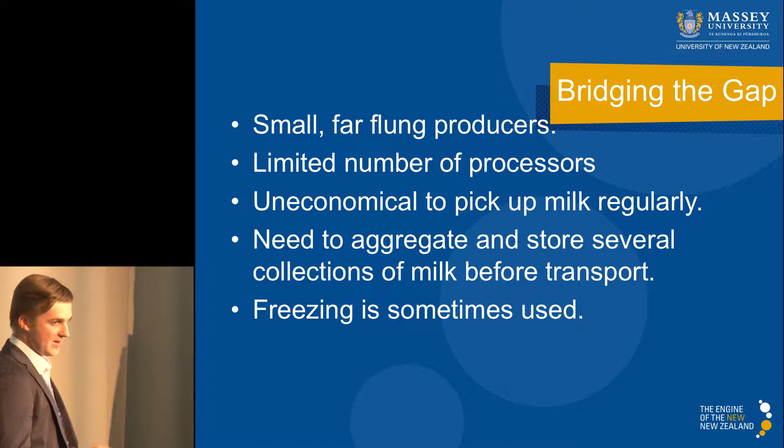So the aim of our project is effectively to bridge the gap between a small producer and a processor. So if you're a small producer, you might not produce the volumes where it's economical to have it regularly picked up to an outside processor, so you need to therefore make your own added value products. And on the other hand, if you're a processor, you might find it difficult to get a number of small producers. So what we need is some way of aggregating and storing several collections or milkings worth of milk before it can be sent off.

So what is sometimes used is freezing the milk. However, this freezing is generally done using a slow freezing method by putting bags like these of about 10 to 15 to 20 litres in blast chillers. And this can lead to some issues such as losses in cheese yield, changes in the total solids, components of milk, separation and oxidation of fats into some rancid flavours, reduced protein digestibility, increased renneting times and decreased curd firmness for those cheesemakers.

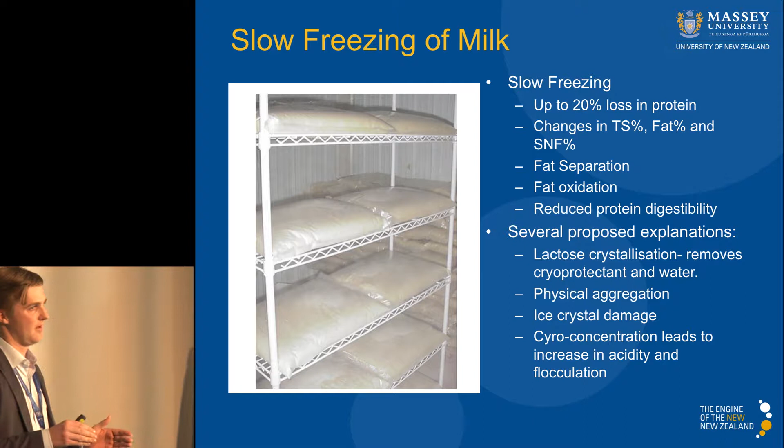And so there have been several proposed explanations for this, and they all basically revolve around the idea of freeze concentration. So when you freeze a solution or a system of particles in it, as the ice front grows, it rejects the solutes and the particles and forms pure ice. So this leads to the unfrozen fraction of milk concentrating, which leads to physical aggregation of the milk components. Slow-growing ice crystals damage fat globule membranes, and changes in the salt balance and the acidity can lead to protein flocculation and protein sedimentation.

So, how do we propose that we'll be able to prevent this? Basically, we aim to do it by freezing milk quickly. So, if you look at how the solutes in a salt solution are rejected as a function of the growth rate of the ice, as you grow the ice faster, more of it is trapped within the ice. So we assume that by growing our ice very quickly, about 30 times higher than has been studied in these previous studies, we have trapped the components of the milk within the growing ice layers, and therefore prevent degradation.

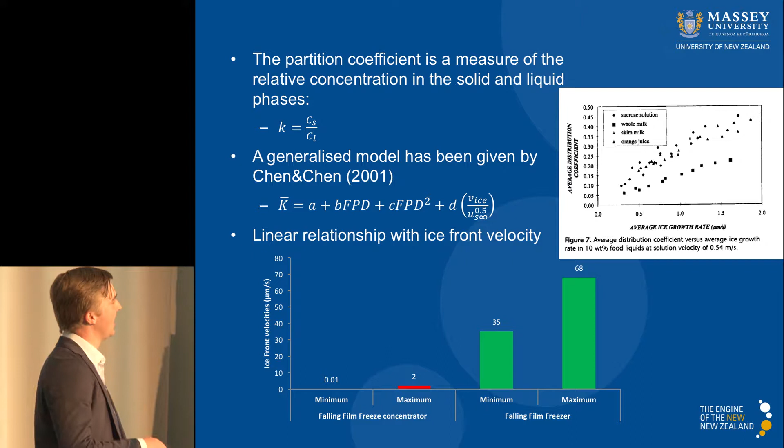And another area where this is looked at is the material science world and something called freeze casting. And what they have found is that above a critical velocity called VC here, you can actually trap all of the particles within your moving ice front. So for one study, this moving ice front, which would trap 1 micrometre particles, is about 30 micrometres a second.

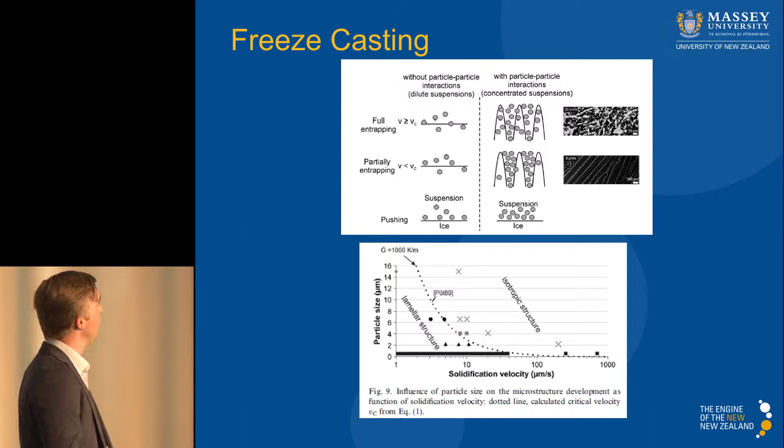So at the start of this work I originally discussed last year at the conference, saying that we were beginning a 3-year development plan. So the original way we aimed to do this was to freeze it as a droplet, as can be seen here. And these were frozen by immersion in liquid nitrogen. So how do we achieve this? Immersing in a cryogen is obviously very expensive, it's hazardous, so it's not really suitable for a low-cost on-farm solution. You could use a prilling tower, so you drop droplets against cold airflow, but this would be very high and would therefore be very expensive.

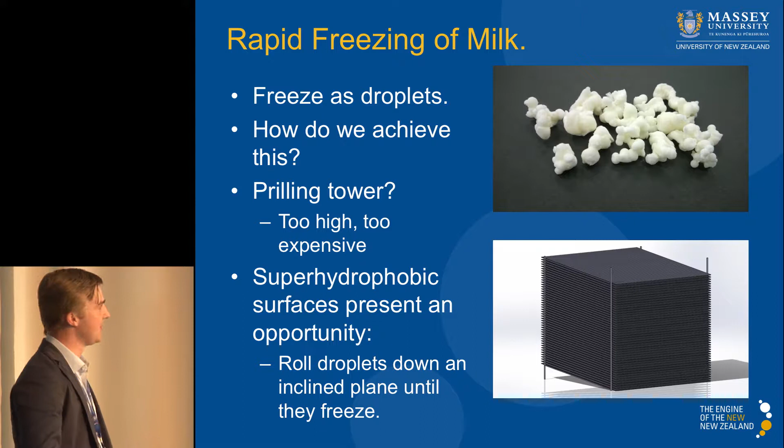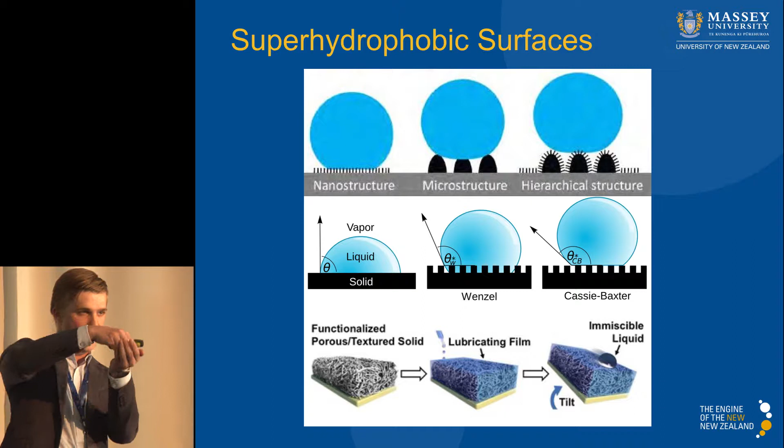And a new technology that's arisen in the past 10 years are what are called superhydrophobic surfaces, where water basically sits on top of the surface and doesn't wet it, so the water sitting on the surface will roll. And this would allow us to roll droplets down a series of inclined plates, just to get a larger throughput per second, against the cold airflow and then freeze. So this is just effectively a description of a superhydrophobic surface.

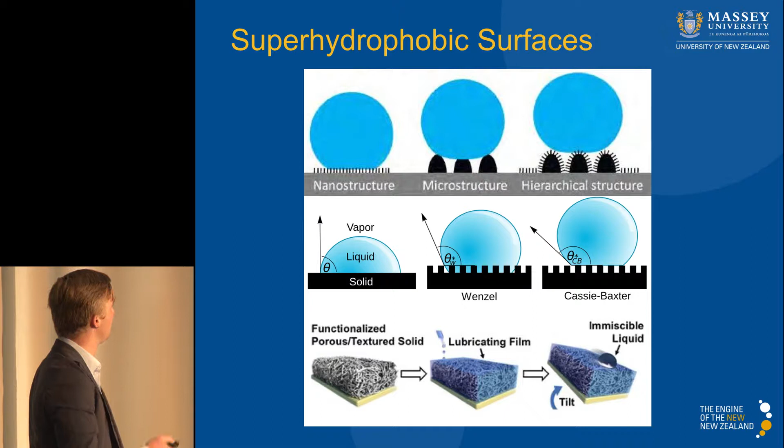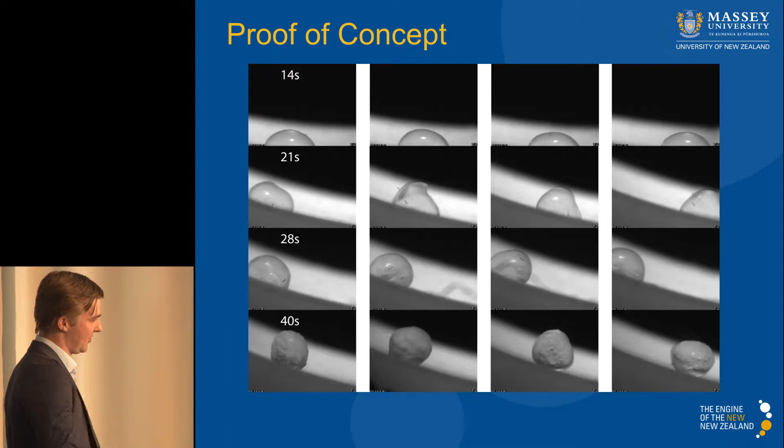At that point, we were starting to run into some issues with the fabrication costs of these surfaces and the system, and with the uncertain icephobicity of these systems. So in some cases, in condensing atmospheres with a lot of moisture, you can actually end up forming frost on those surfaces, which then leads to ice forming directly on the surfaces. And in an array of stacked plates like we had, this would lead to blockages in between the plates, and obviously a blockage in the system. You'd have to heat the whole thing up to try and clean it out, and it wouldn't exactly be a robust, reliable system. So we moved to a new setup, which Georg is going to describe.

So yeah, we had to come up with a new plan, and so the idea as well: we looked at what's already available instead of reinventing the wheel. There are different ice machines available, and they've got all different names like flake ice, shell ice, whoever makes them, they're different. And sometimes they're used on fish trawlers, so you can keep your fish fresh.

And how it essentially works, you have a drum with coolant on the inside, and then you dip your cold drum, the ice layer forms, and you scrape it off. Then it's generally just used for fish or for frozen vegetables as well. And there are lots of different designs, like that's a design used in fish trawlers, which is vertical. So you spray your liquid on, and then you've got a screw which sort of separates the ice off.

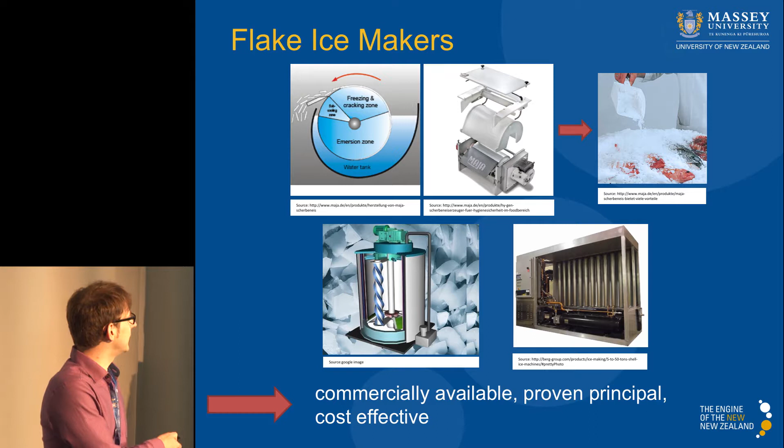And so if we base it on that one, the advantage is that they are commercially available. It's a proven principle, and hence it's cost effective to do so. We have decided to go for a falling film freezer, which essentially works by distributing coolant on the inside of a vertical tube and the product on the outside. And then in the next step, an ice layer forms and it grows outwards.

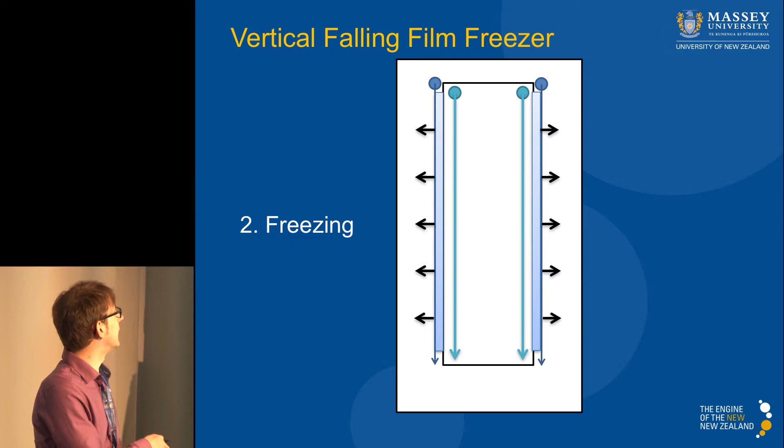And the advantage of using a falling film is that we achieve high heat transfer coefficients, and that's back to what Jolin said. We need to have a high ice growth front in order to trap all the particles we want. And then once we have a desired ice layer thickness, we just turn off the product flow to temper the ice, because we don't want to get wet ice or wet frozen product.

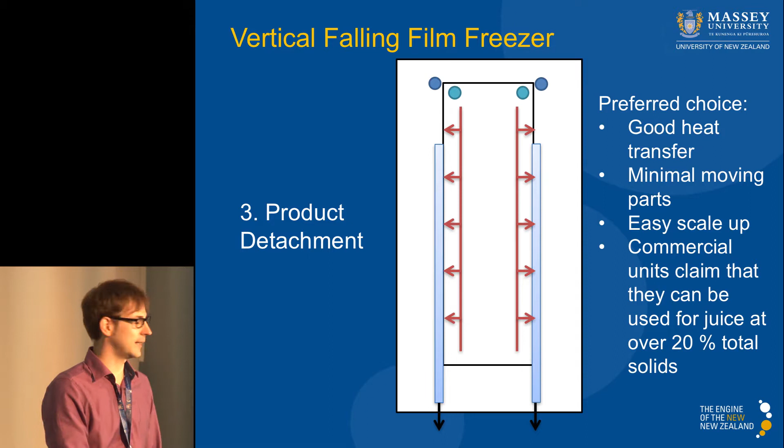And so there are some challenges. We need to investigate what the desired ice growth rates are, what heat transfer coefficients we need to achieve, and also obviously process regulations. As soon as you start freezing something on site, you actually have a processing step, and we have contact with MPI, and that needs to be investigated further so that we comply with all processing regulations. And then other things like product detachment, as I mentioned before, and food safety, of course, and does it meet our product quality requirements as well.

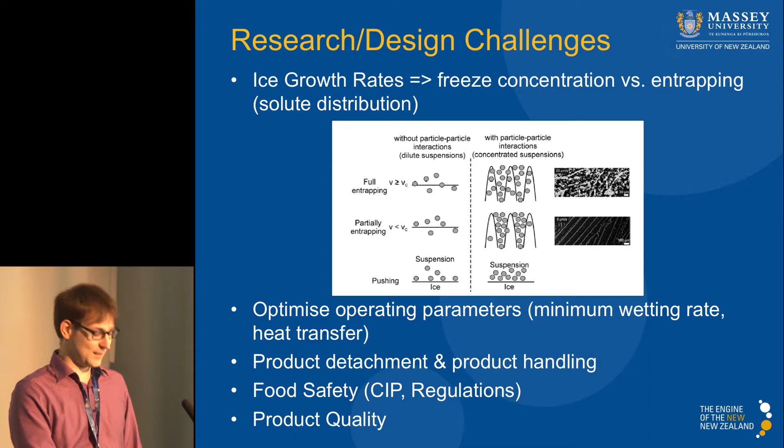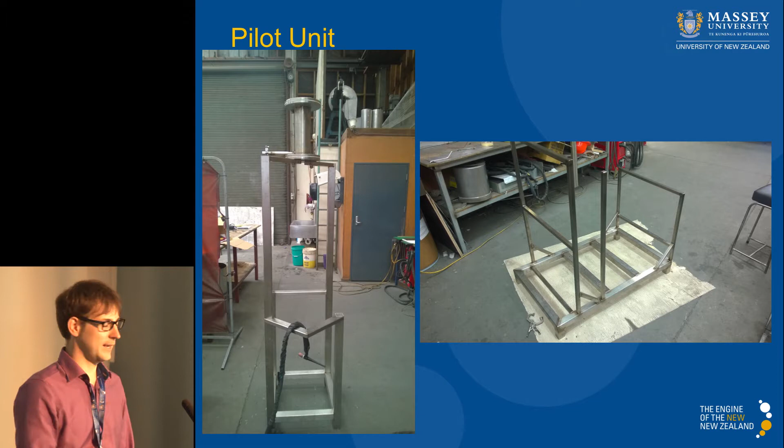And if people are interested and would like to trial it, please get in contact with us, or if you're interested in some products or generally you'd like to try something, please contact me or Jolin. And that's just a little update from our project at Massey. Thank you.

Thanks, Jolin and George. That was interesting. I must ask, what's the reason for freezing rather than just holding it at 2 degrees, for instance? Well, freezing allows us to store it over a much greater period of time. If you look at the studies, if you freeze it fast enough and store it cold enough, you can actually get good product storage for periods of up to, say, 9 months. 2 years. Yeah, okay, the studies I saw looked up to 9 months, maybe they got bored after that point. So yeah, it allows for a much longer storage time. Thank you. Any more questions?

So what about transport costs? Because if you freeze it on site, then you have to transport it frozen, and surely that's a lot more expensive than fresh. Well, the idea is, if you transport it fresh, you have to process the milk within 3 days at the absolute maximum from collection, I believe. So you'd need to be travelling far more regularly if you were transporting fresh milk than frozen milk.